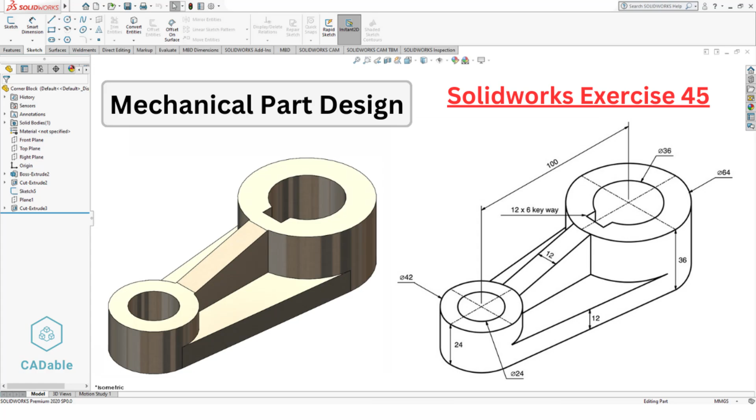Let's go to SolidWorks. Here you can see I am using SolidWorks 2020, but if you are using a below version or a future version of SolidWorks, you can still follow this tutorial.

Let's go to here, new, select part and select OK. And now we are in SolidWorks interface.

First of all, I will change my background to plain white and I will set my units to MMGS, which is millimeters gram second.

Okay, let's go to our drawing. First of all, we will model these two parts, these two bosses, this boss and this boss. Basically it is the extrusion. Then we will create this part, and finally we will create this rib and this keyway.

So this pitch is 100 millimeters and this diameter is 42 and the inner diameter is 24, and here 64 and 36. So let's go to SolidWorks.

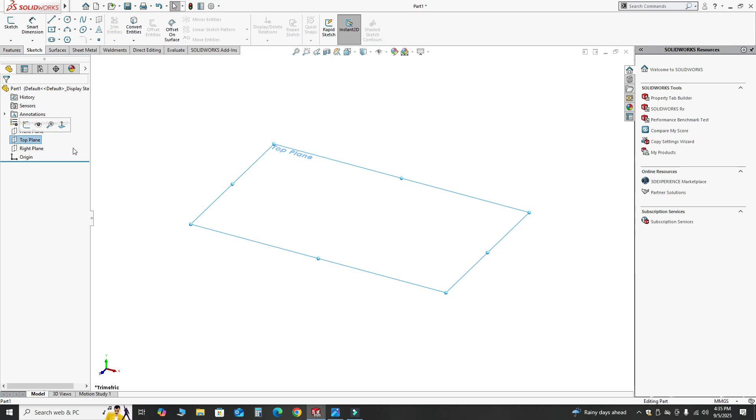I will sketch on the top plane, and I will make one center line like this, and this dimension is 100.

Center lines are not part of my sketch, these are just for reference. Let's make one circle here and let's make one circle here.

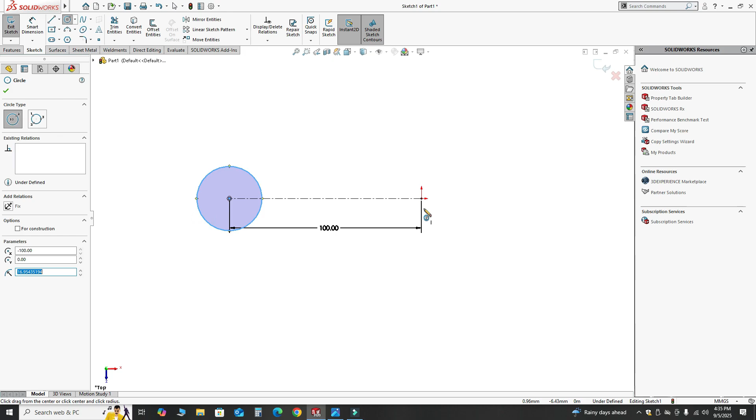This dimension is 64 and this is 42. So this is 64, and this is 42.

Also, the inner dimension is 36 and this is 24.

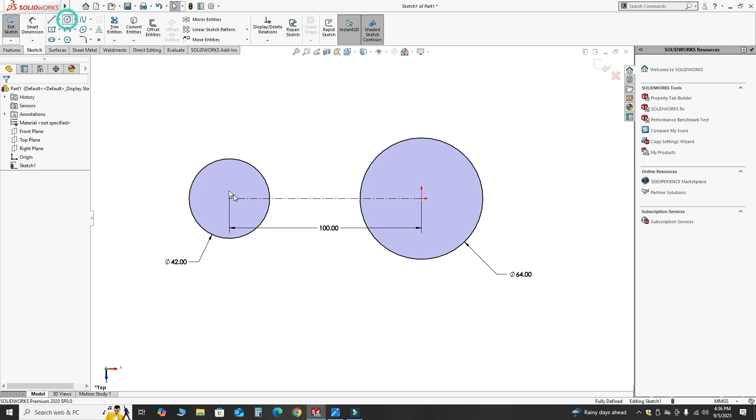So I will make another circle and another circle here. Okay, so let's dimension these. This is 24 and this is 36.

You can see the color of the sketch is turned into black, which means that this sketch is fully defined. I always prefer and advise you to create fully defined sketches, as these will not create any confusion.

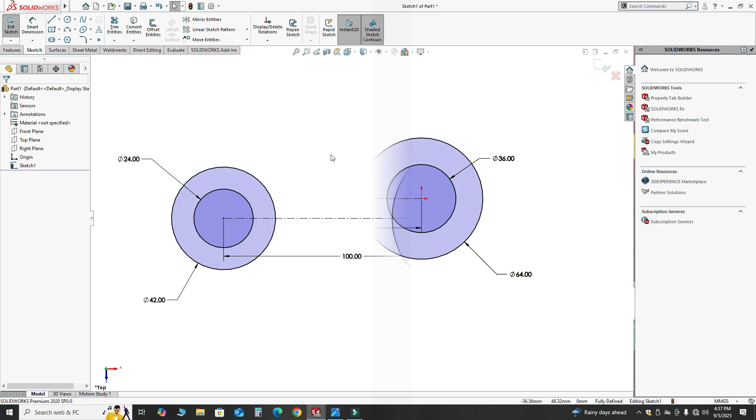Okay, so our sketch is completed and I will exit this sketch. I'll go to here, features, extruded boss, and I will extrude these contours.

You can see this height is 36 and this height is 24. So first I will select this contour. This is not the correct contour, just clear this. I need this contour only.

The height of this contour is 24, you can see here. So I will change it to 24 and select OK.

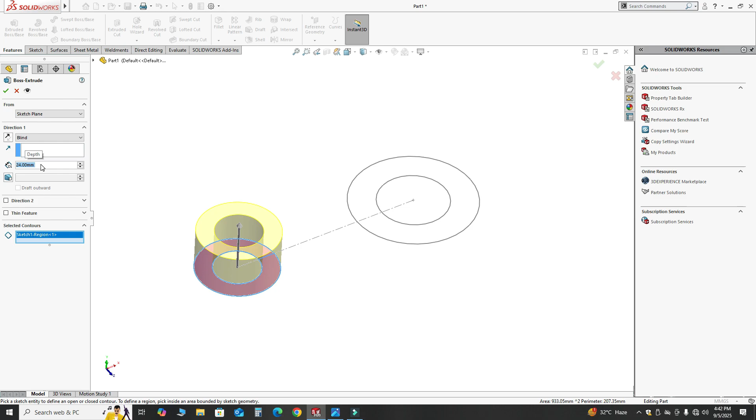Similarly, go to here, extruded boss again. I will select this one. Just clear this. I need only this contour, okay?

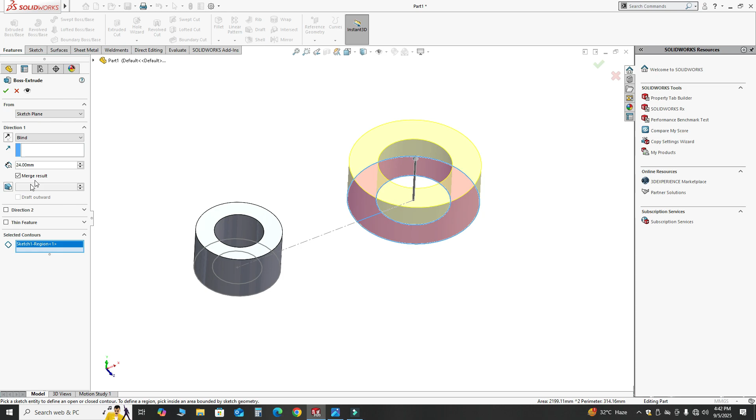And the height of this contour is 36. I will create this keyway in the end. So let's change it to 36.

Now we will create this base. The thickness of base is 12 and it is tangent to this circle and it is tangent to this circle or this boss. So let's pick this top plane, sketch.

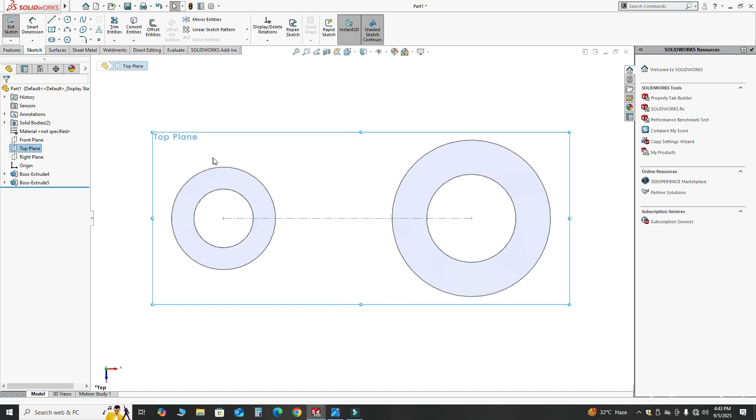First I will convert this circle. Basically converting a circle means that I am including this circle in this current sketch, so you don't need to create this circle again.

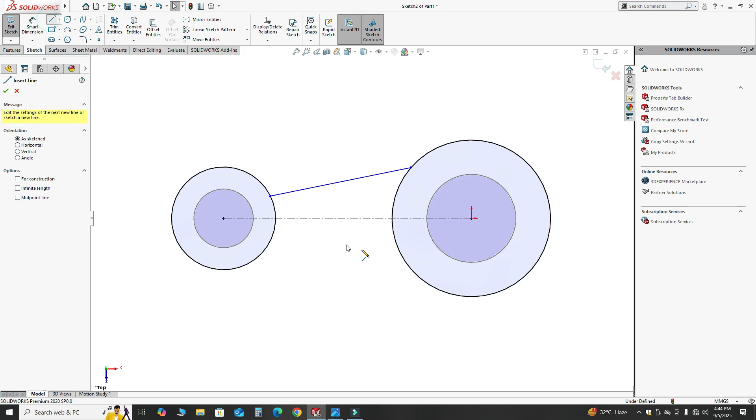So here we will create two lines. Let's say one line like this and another line like this. Okay, you can see this line is not tangent.

So I will select this line and select this circle and make it tangent. Similarly, I will select this line, select this circle, and make it tangent. Also this line, this circle, make it tangent, and this circle and this line, make these tangent.

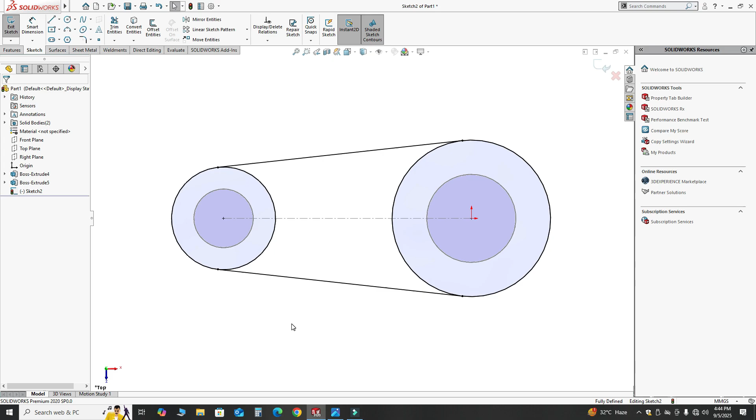Now you can see the color of the sketch is turned into black, which means that it is fully defined. I don't need this portion, so I will trim it. Also, I don't need this one. Now you can see we have a closed contour.

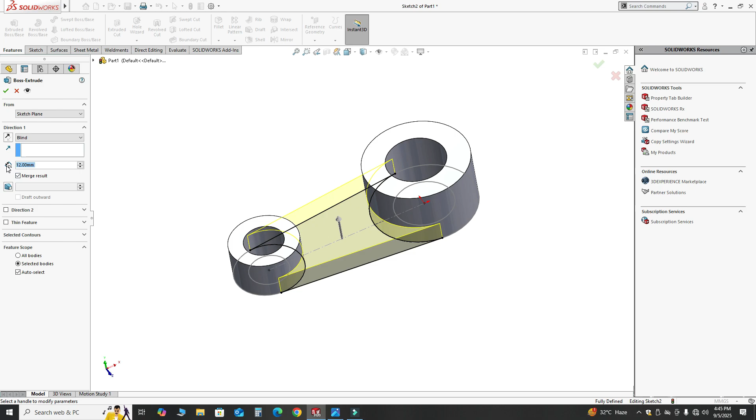Now you can see we have a thickness of 12 millimeters in the upward direction. So go to here, features, extruded boss, and this time I need an extrusion of 12. Make sure to check this box, otherwise it will create 3 separate bodies. I need a single solid body.

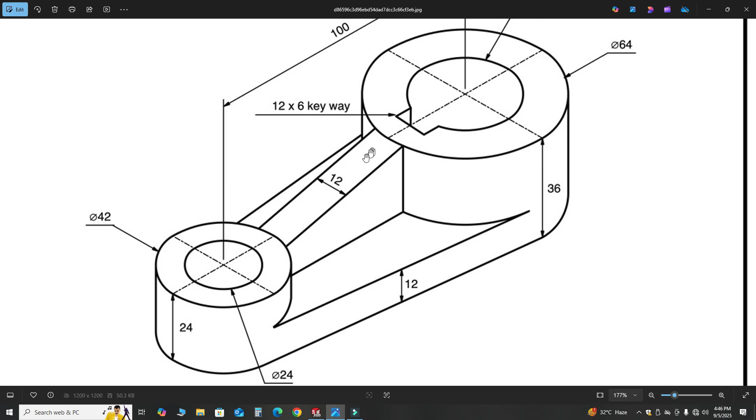And just hide this sketch. Now you can see we have a rib here, and the thickness of the rib is 12 millimeters, and it is right at the center, 6 millimeters from here and 6 millimeters from here.

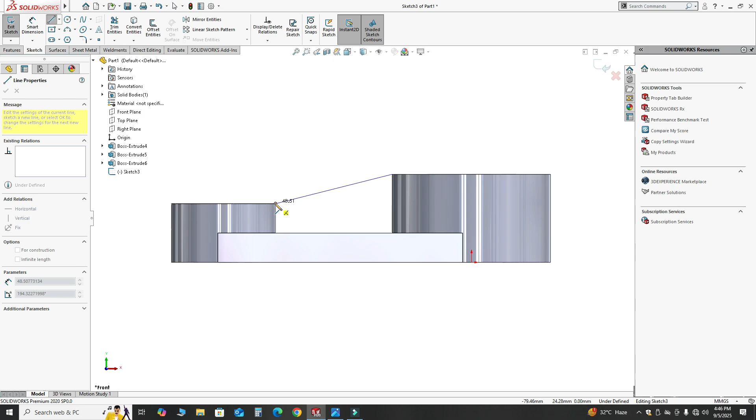So for the rib we have to create a sketch right on the plane. Go to sketch, and I will select this plane, and I will sketch one line connecting this point to this point. You can see it is not fully defined, so I will select this point and this circle, and make it pierce. Now you can see it is fully defined.

So let's go to features, and go to rib, and I will change this direction. Basically I need to flip this direction. The thickness is 12 millimeters, I will change it to 12. Also you can see this rib is on both sides - this rib is on the right side only, and this rib is on the left side. Basically ribs are used to reinforce your part, or give strength to your part, so it will not bend in a certain direction. And I will select OK.

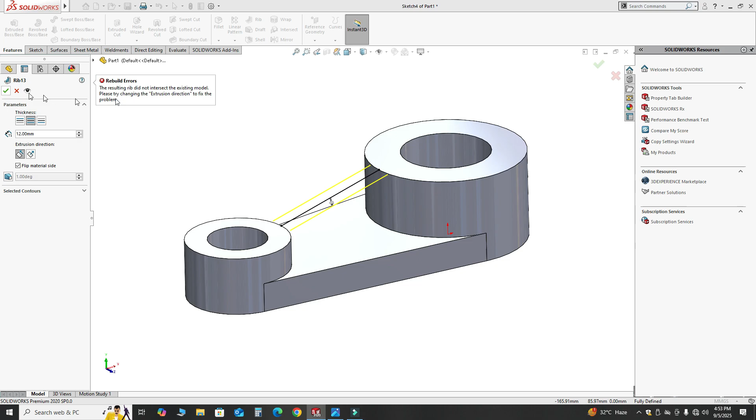Now you can see we have an error here. The resulting rib did not intersect the existing model. You can see here it is not intersecting our geometry. We need to do a little modification. I did it deliberately because you will see this error so many times when working with ribs in SolidWorks. So I will cancel it.

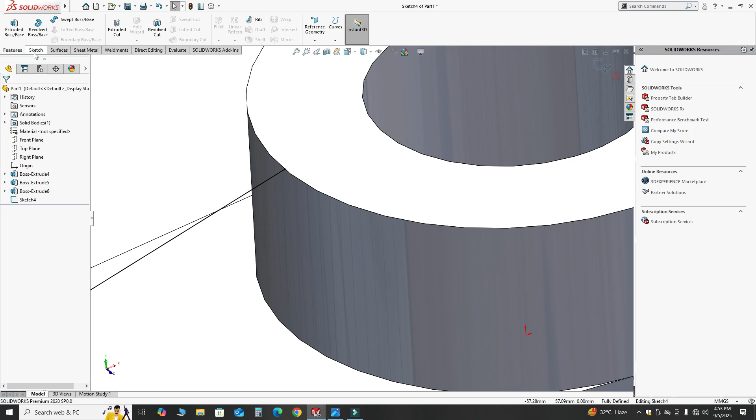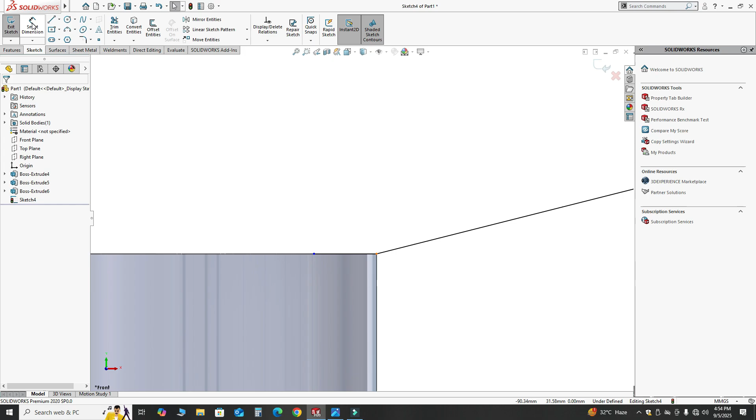I'll go to sketch again, and create a sketch like this. Basically it is horizontal, and also I will make one line like this. You can give it some direction, but it does not matter. Let's say it is 1 millimeter, and also 1 millimeter. Now it will work.

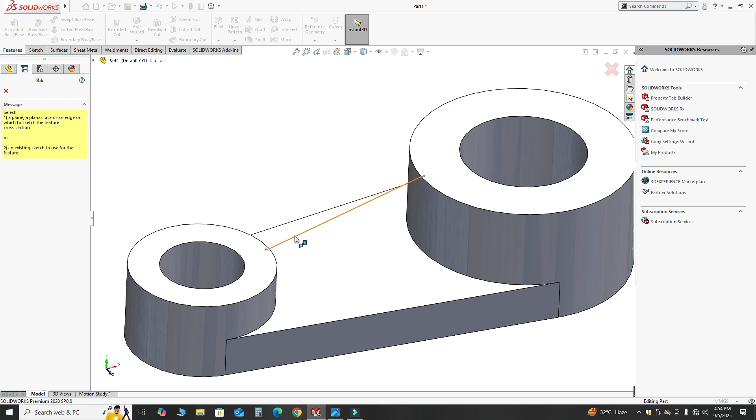So I will exit this sketch, go to features, rib, I will select this sketch, and here you can see it is intersecting our model. I will change it to 12, thickness on both sides, and change this direction, and select OK. Now you can see the rib is created.

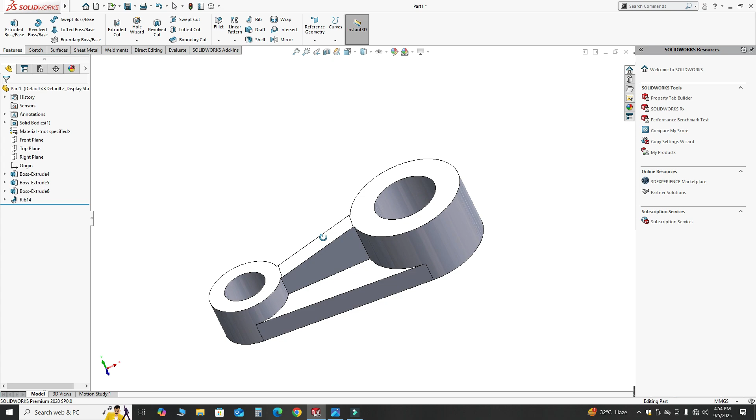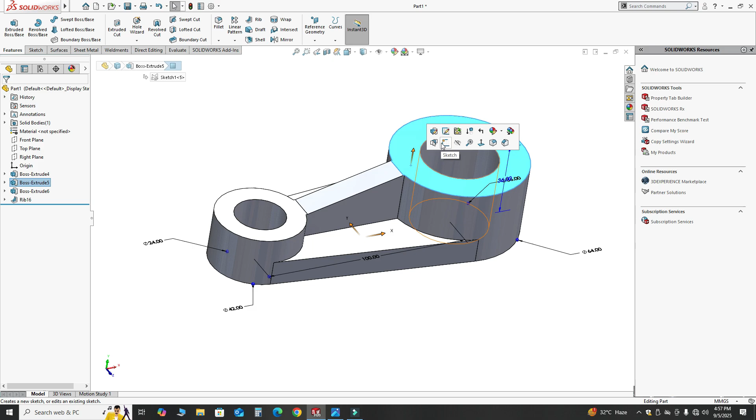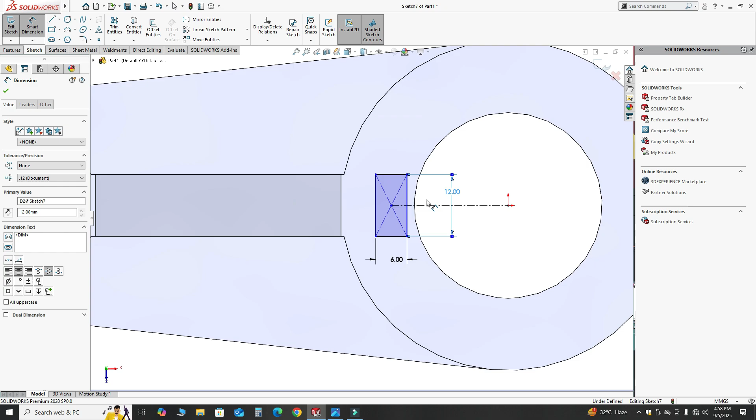Okay, so lastly we have a keyway here, and this dimension is 12 by 6. This dimension is 12, and this dimension is 6, and it is symmetric. So I need to create this keyway. Go to SolidWorks, and I will select this face, sketch, and create a rectangle here like this. And I will create a center line, just for reference. This dimension is 6, and this dimension is 12. I will select this point, select this circle, and make it coincident.

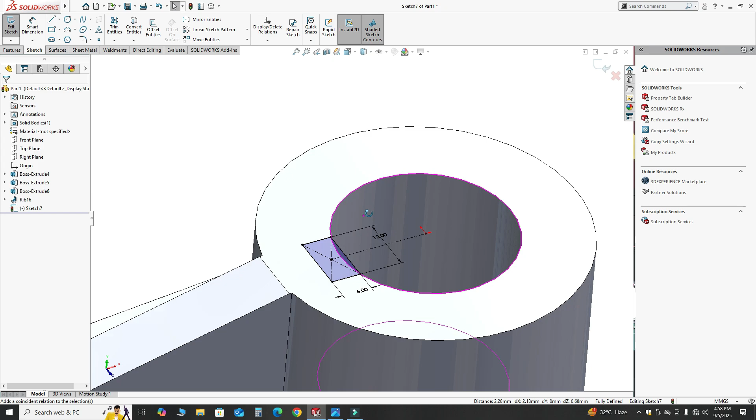And I will cut this contour throughout. I will rotate my model. I'll go to features, extruded cut, and this time I will cut it through all. I will change this option to through all and select OK. Now you can see a keyway is created.

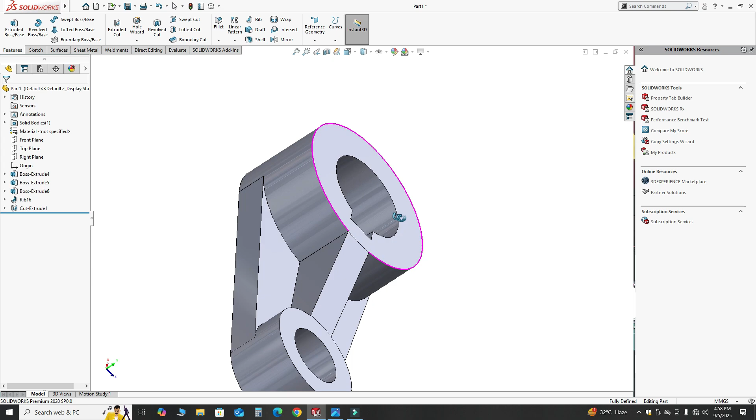Lastly, we will apply some appearance on this part. So go to edit appearance. Here you can apply some color as well, and you can apply some material appearance as well. Let's say chrome or maybe bronze.

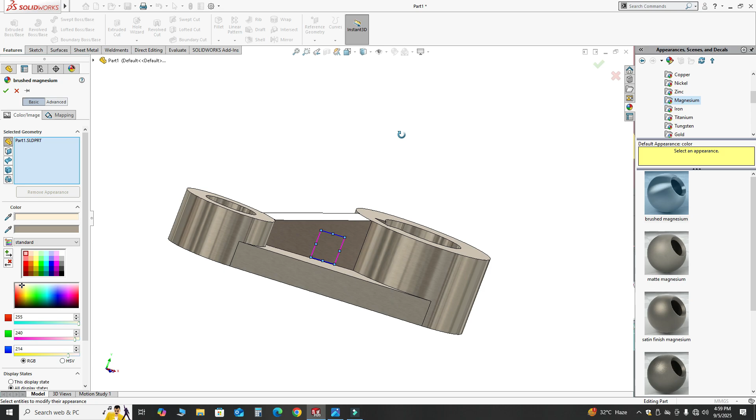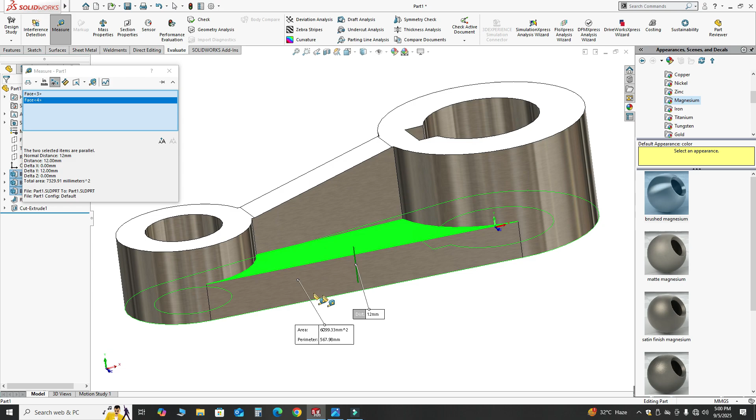So that's how you can model simple parts in SolidWorks. You can validate your model using the evaluate command, and go to measure, and validate some dimensions. Let's say this pitch is 100 - I will select this circle and this circle, and you can see this distance is 100 millimeters. Also, let's say I want to find out this thickness - it is 12, and you can see here as well it is 12. Let's say I want to check this height, it is 36. So I will clear these selections, select this face and this face, and you can see this height is 36.